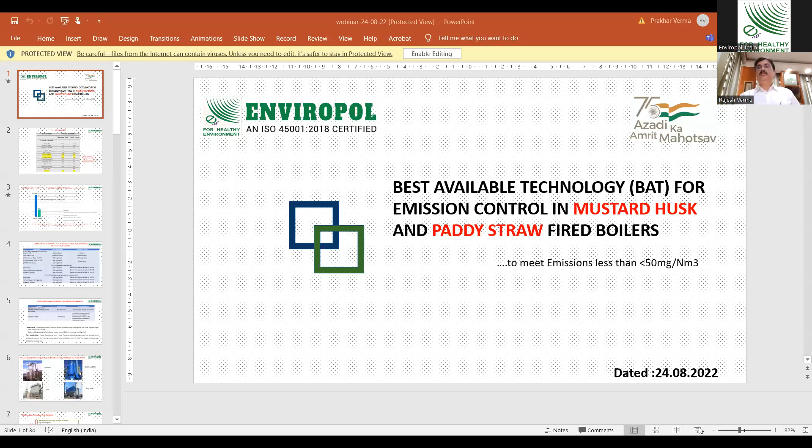Okay friends, so let us start today's learning session on best available technology, we shall be calling it BAT from now onwards, for emission control in mustard husk and paddy straw fired boilers. Today's focus is going to be to meet the new, upcoming emission norms of below 50 milligram per normal meter cube for boilers above 10 TPH.

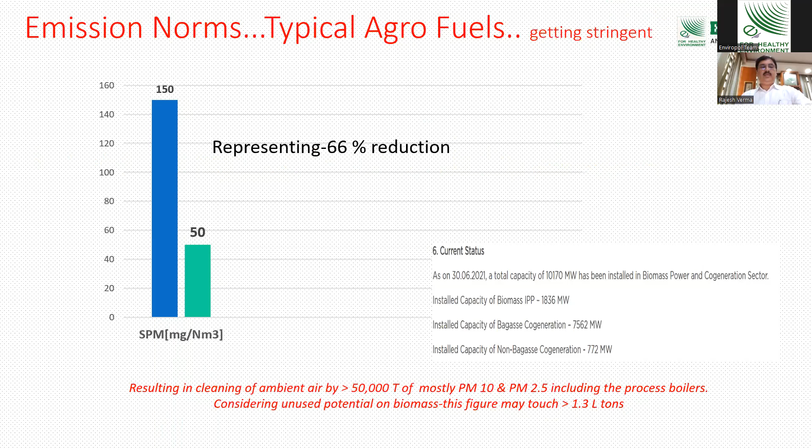So mainly potassium, sodium, chlorides and other compositions, these elements are very sticky in nature and have higher resistivity. The electrical resistivity of these fuels is higher compared to coal and other fossil fuels. The particle size, especially in mustard husk, is very fine, submicronic particle size is there.

The most critical part of the whole biomass application is the varying moisture content in the biomass. Maybe in one month you get good moisture content, but next month if the rainy season comes, suddenly the moisture increases, and that spoils the whole setup, especially on the pollution control side when you have a bag filter. So these are basically the nature and characteristics of the fuel, the morphology, which creates problems in the APC devices or existing technologies.

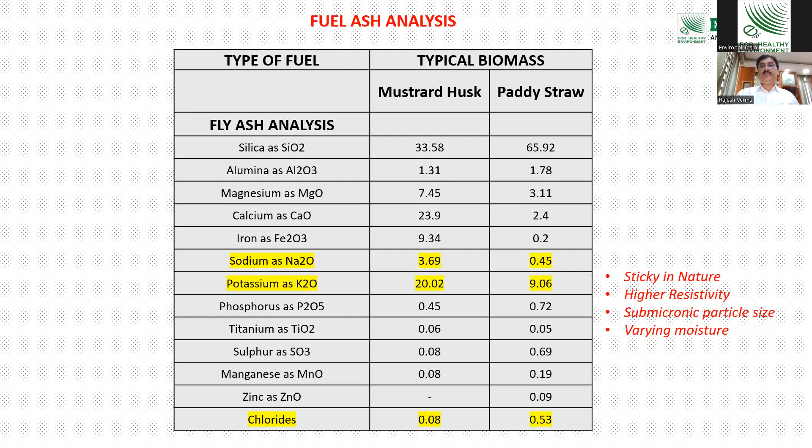On the other hand, the emission norms are getting more and more stringent. If you look at the overall picture on biomass generated power, by reducing from 150 milligram to 50 milligram per normal meter cube, we are going to clean our environment by more than 50,000 tons of fly ash. This is considering that as on date we are producing approximately 10,000 megawatt of power from biomass.

Either from the cogeneration sector or independent biomass-based power plants. Considering this, and considering PM10 and PM2.5, we are going to clean the environment by more than 1.3 lakh tons of fly ash, taking into account that the biomass potential which exists in India can be consumed in the next couple of years, and thermal power plants also start using biomass. As on date it is about 50,000 tons, but in successive years, as the biomass proportion increases in all thermal power plants, this figure may touch about 1.3 lakh tons of fly ash, which is quite a big amount as far as environmental pollution is concerned.

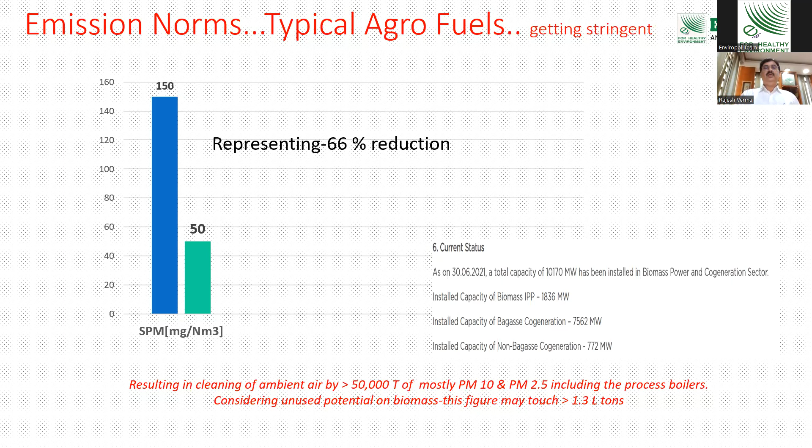Comparing the existing norms and proposed norms: all boilers above 10 TPH now have a limit of 50 milligram per nm cube, as against the earlier norm of 600 milligram. Especially in the NCR region, people are trying to get more stringent, below 30 milligram, and most plants are aspiring to get there. Below 10 tons, the emission norms are still 150 - earlier it was 800. And less than 2 tons, it is 500 milligram.

So our focus today is going to be on below 50 milligram for all those boilers, because this particular sector we are addressing today mostly has boilers of 10 ton, 15 ton, 20 ton, or maximum 60 tons.

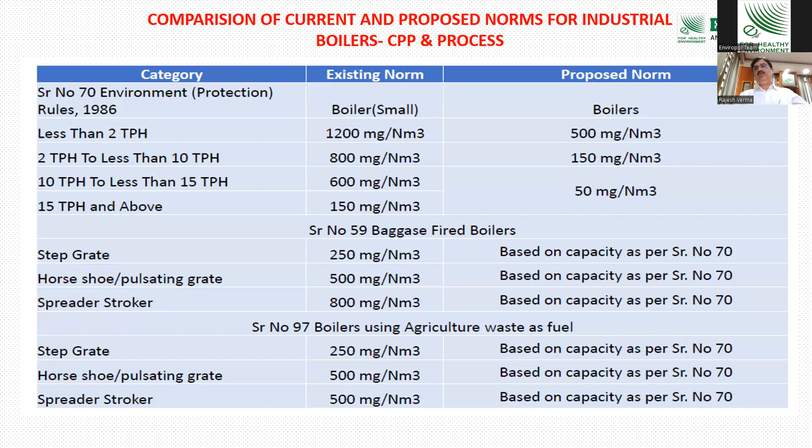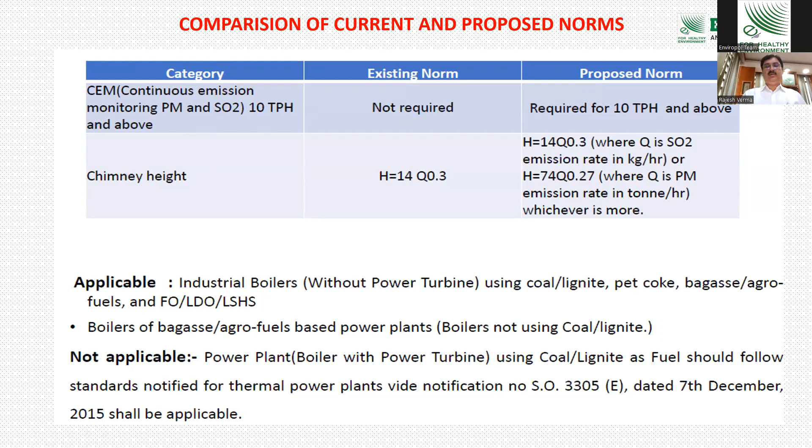Other norms, especially regarding the continuous emission monitoring system, CEM - all boilers above 10 tons would require CEM to be installed on the chimney as per the new proposed norms. So this covers the norm side, the mandatory emission norms.

Now let us review the prevailing technologies which are mostly available in this sector as on date, and the concerns the customers or operators are facing.

Majority of the plants in this category are still using cyclonic separators. The earlier norms were 500, and cyclones were able to meet that in most cases, barring a few where they were not designed properly. Otherwise, cyclones are capable of meeting below 500 milligram. So majority of the sector has cyclones as on date.

Some people have upgraded in the past to ESP, some to bag filters, and some have added a scrubber. Wherever the cyclonic separators were not working and people were targeting below 150, especially in boilers above 10 tons, they have gone for either wet scrubber, bag filter, or ESP, in addition to the cyclone.

Now let us see, given these four technologies are present, what is their condition, what are the concerns on each category, and why do we need something beyond this? When we want to achieve below 50 milligram, why do we need to upgrade the technology? Why can't we make changes to achieve below 50 milligram?

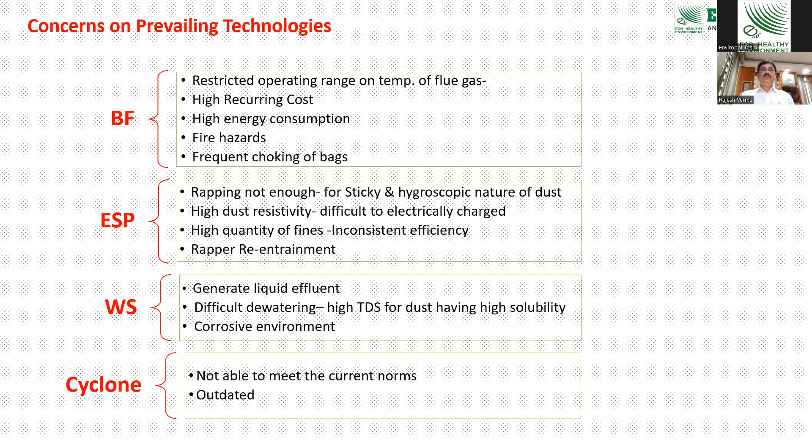So, to summarize everything, the limitations on the existing systems are basically because of these parameters. The fine particles, the ultra fine - as you have more proportion of fines, it is more difficult for the APC design, it becomes more complicated.

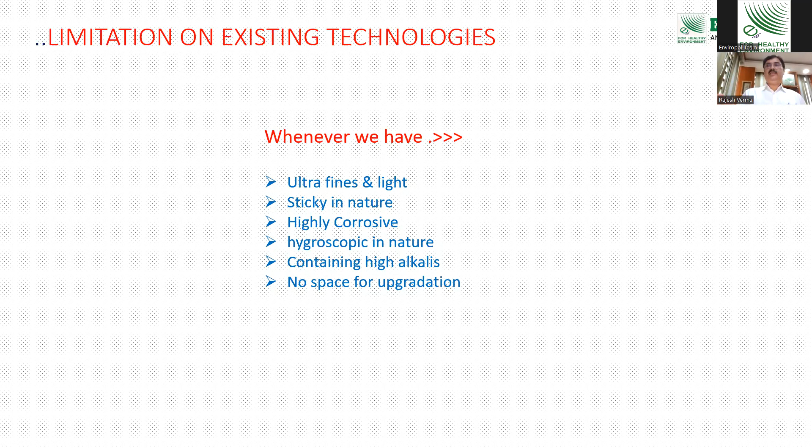High alkalis and no space for upgradation is a physical parameter which is a restraint in most plants. The space is not there for upgrading these equipments. So these are basically the limitations the industry is facing on these fuels as on date.

So if I summarize everything and put down the consolidated pain points of the industry - they are already using a difficult biomass, helping the society to reduce pollution, helping the society or the planet to reduce greenhouse gas emissions.

But their pain points are growing because of these factors. Like, in a normal mustard husk boiler, you see the input dust concentration from the boiler is in the range of 5 to 6 grams per normal meter, whereas in paddy straw, it is a high dust fuel and it exceeds beyond 15 grams per normal meter.

The current in most plants, cyclones are there, but those cyclones are not able to meet the norms. This is a pain point, definitely.

ESP and bag filters do have some limitations. This is another pain point because they do not know which way to go. If they use ESP, they have some concerns. If they use bag filter, they still have some concerns. So what to do? Wet scrubbers, if they use, still they have some concerns on dewatering and all.

So the technology limitations are there. This is another pain point which the industry is suffering with. High recurring cost - in a couple of technologies people have gone with, they are having a high recurring cost of replacement of bags or replacement of electrodes every 3 years.

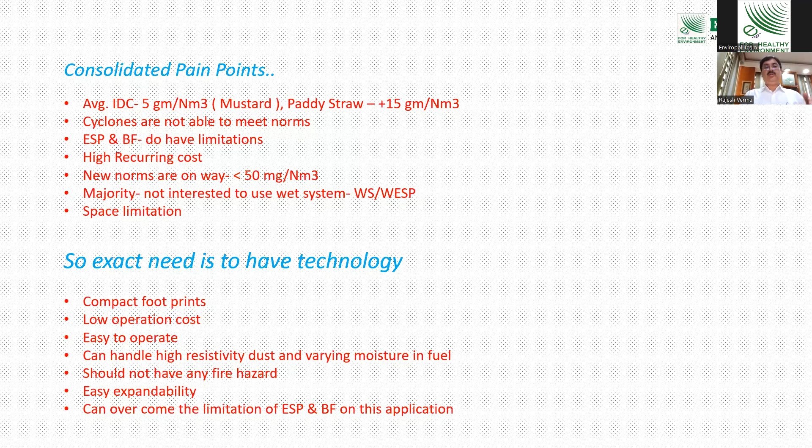And the technology should be able to overcome all the limitations of ESP and bag filter. Either it should replace or it should complement them, either way is possible. If it can complement the limitations, that's a good combination. Or if it can remove those limitations completely, that's another solution. So we will be discussing the new technology based on these parameters we have listed, to see how the new technology qualifies on all these parameters. So what is the solution?

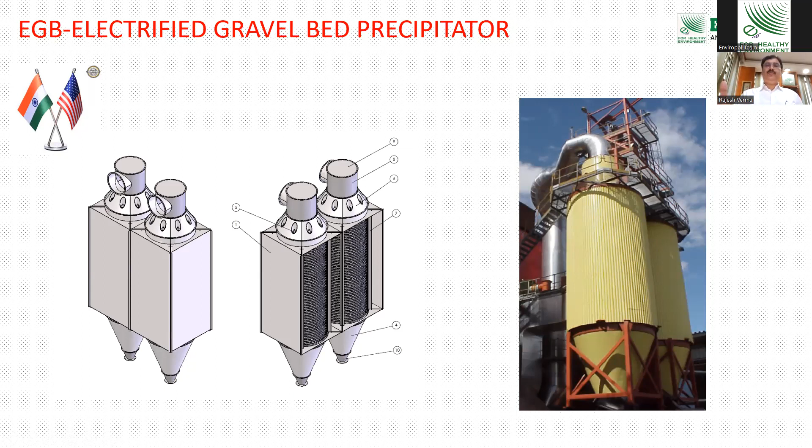So we shall be discussing what EGB is, because many of you may not be knowing about it. Let me explain the system configuration of EGB, how it looks, and what accessories are attached to it. This EGB is basically a cylindrical vessel. It can have one vessel or two vessels, depending on the sizing or the volumetric flow rate of the gas and the dust quantity.

Within this vessel, there are gravels. When I say gravels, these are stones, pea gravels, normal gravels which you get from the river. This complete section is filled with gravels, and the thickness of the gravel bed may vary based on various design input parameters and desired output parameters. So what we do is ionize the gas particles to a negative charge, and then the gas passes through this gravel bed. It could be top to bottom, or bottom entry to bottom outlet, or reversed. It can be designed both ways.

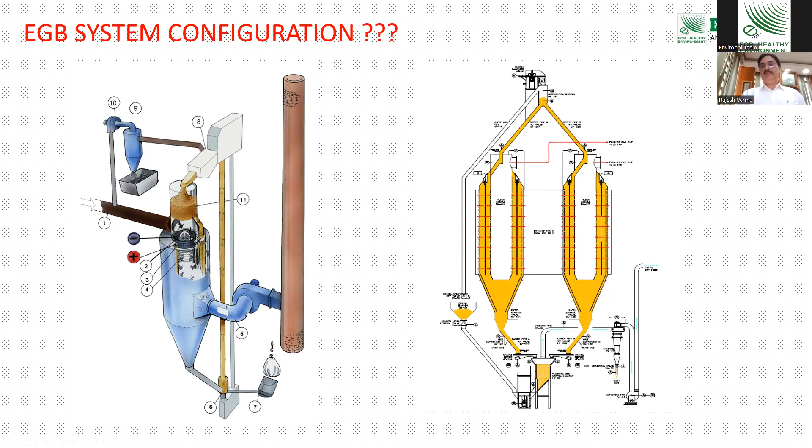Now let us see the principle of its operation, how it works.

As I mentioned, that exhaust gas first passes through an ionizer, which is a pre-charger basically, which charges the particle. This has got a TR set and an ionizer, where the particles present in the dust, in the flue gas, get negatively charged.

And when the negatively charged particles pass through this gravel bed, which is electrified giving a voltage of 20 to 30 kV, these are the discharge electrodes embedded into the gravel bed. When the electrodes are given a voltage of 20 to 30 kV, the whole gravel bed gets polarized and gets a balanced charge.

Half of the gravel gets a negative charge and the other half gets a positive charge. Because gravel is a non-conductor of electricity, it receives the voltage and then gets statically charged from all sides. So when the negatively charged particles pass through this gravel bed, which is already electrified, the positive side of the gravels captures the negatively charged particles.

This gravel bed is continuously moving from top to bottom because of the gravel feeder at the bottom. The RPM of that can be controlled, and accordingly the speed of evacuation can be controlled, and efficiency and pressure drop can also be controlled by doing this.

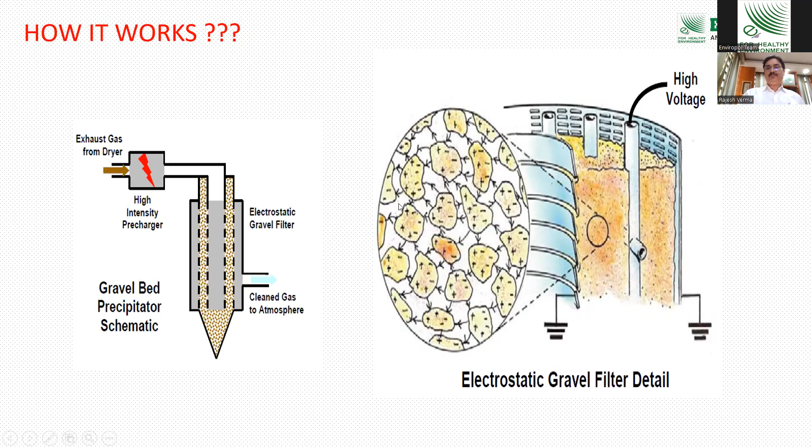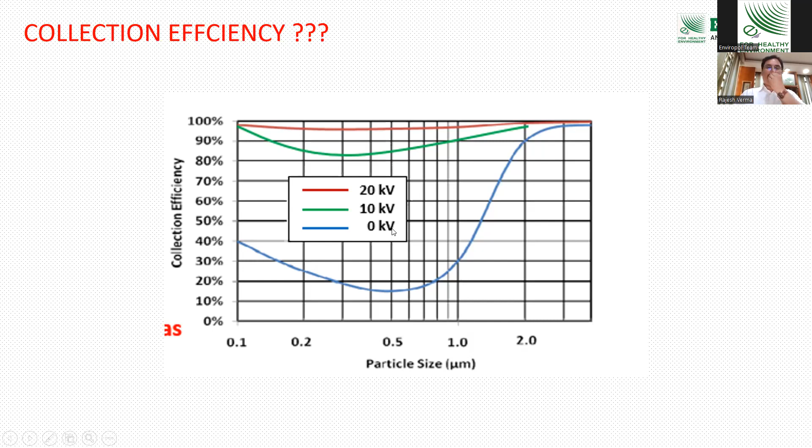I'll now show you some videos. Please see these videos carefully.

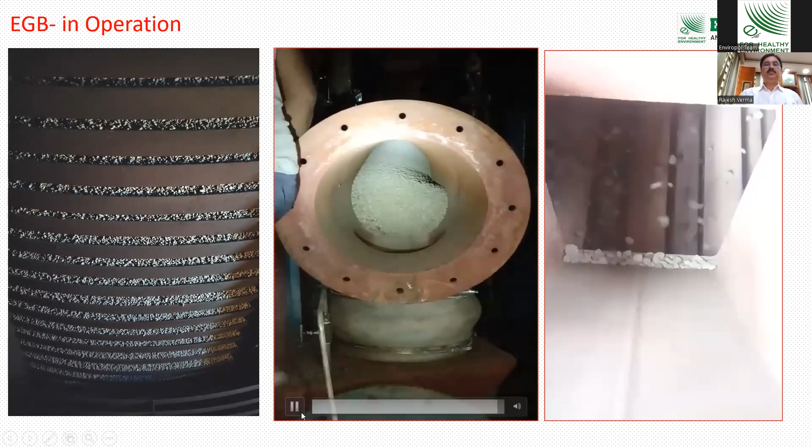So you can see some loose ash on the gravel when it is moving. It is because the electrostatic field is over. When it comes out from the electrostatic field, out of the EGB vessels, the ash particles which were deposited on this get loosened up and then get separated easily by pneumatic pressure.

And after cleaning, in the gravel cleaner, you see how the gravels get cleaned. This is the operation of the gravel cleaner, where mechanical and pneumatic pressures are both used to clean these gravels and take the ash to the cyclone through a dedusting fan.

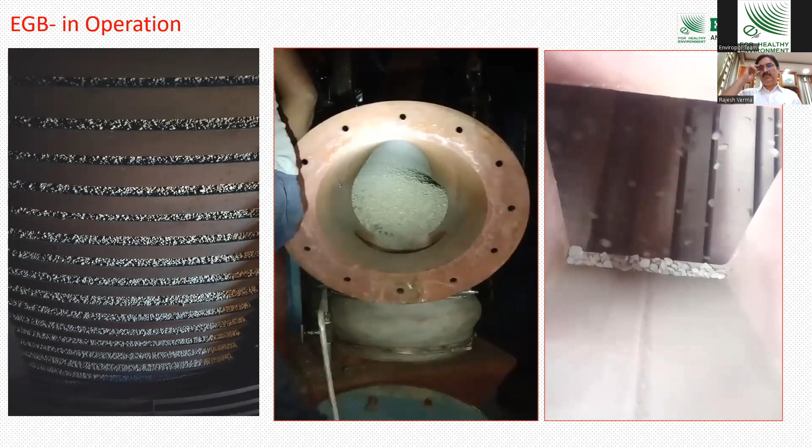So I hope these videos can give you a lot of insight. And you see the clean gravel - this is the clean gravel, and this is the ash deposited gravel.

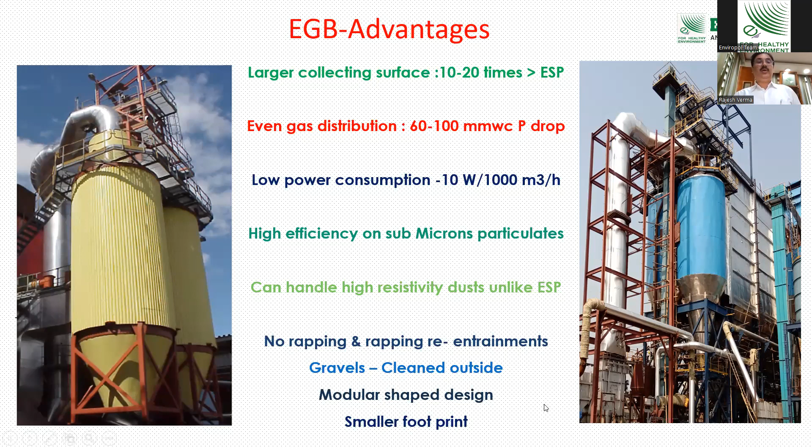So I hope you are enjoying this session so far. I'll now like to show you a couple of references worldwide on this technology.

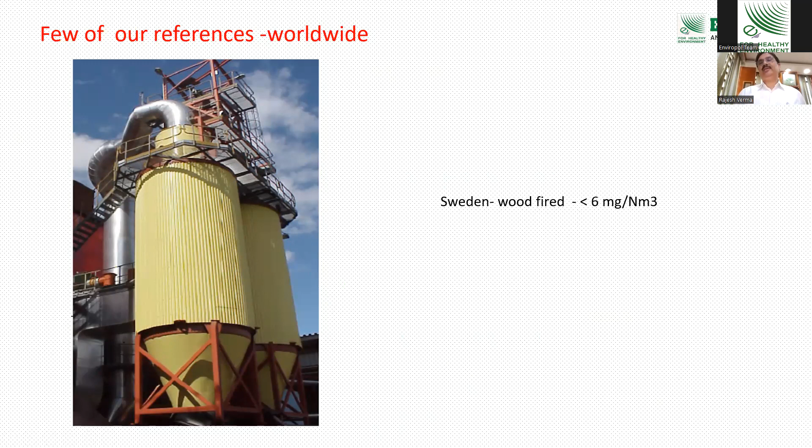This is the installation in Sweden, which I have seen personally running on a wood-fired, rubber wood-fired boiler, consistently for the last 15 years. And the emissions, which I have seen from my eyes, are below 6 milligrams. Their record also says it was designed for 10 milligrams, but consistently they are getting below 5 to 6 milligrams emissions from this boiler.

This is the installation recently done on a spent wash fired boiler in India, attached with a 2-field ESP, because in a spent wash the input dust concentration is very, very high. So we used ESP as a pre-dust collector for the coarser particles, and the fine particles are captured in the vessel, or the EGB. This has been demonstrated at 50 milligrams per normal meter cube.

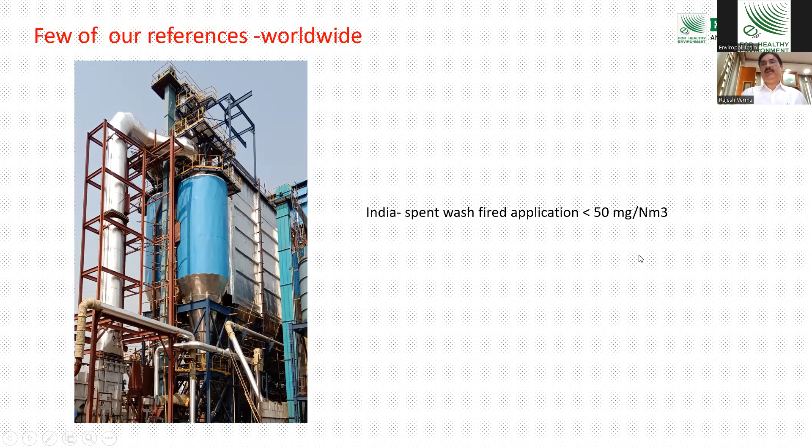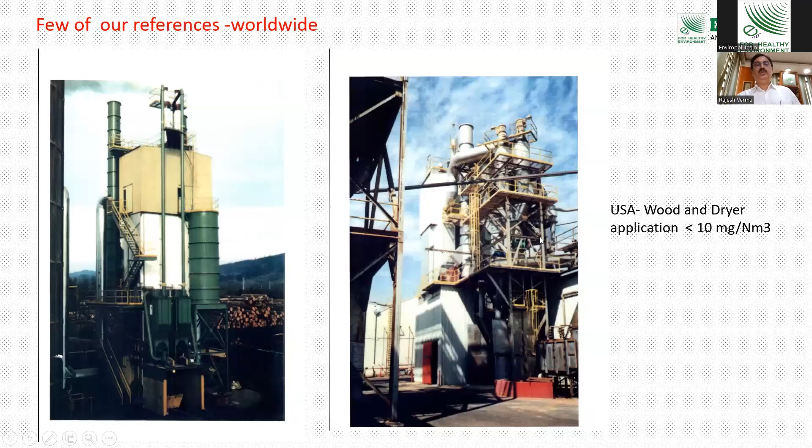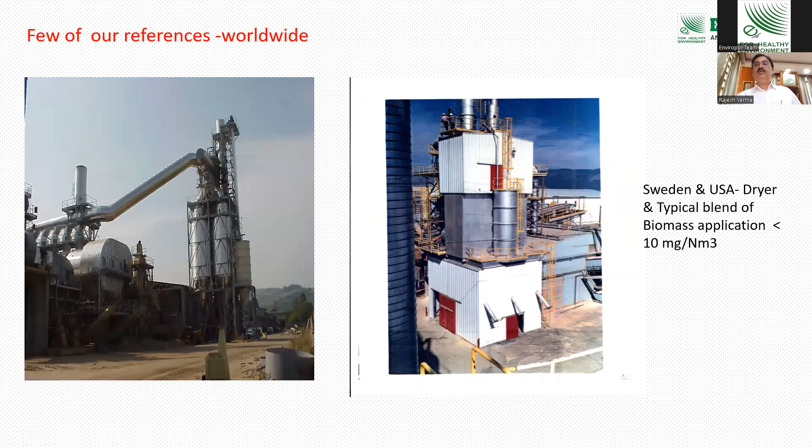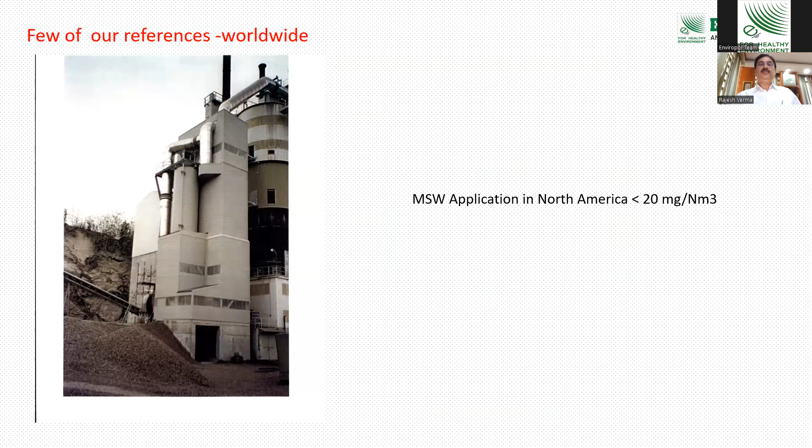Other installations in the world, on the left-hand side and on the right, are on wood and wood-based dryer applications, less than 10 milligrams. Then on typical biomass applications in Sweden, and again in USA, below 10 milligrams. MSW application, municipal solid waste, in North America, less than 20 milligrams. And there are a few more, in India, because this technology came only 3-4 years back.

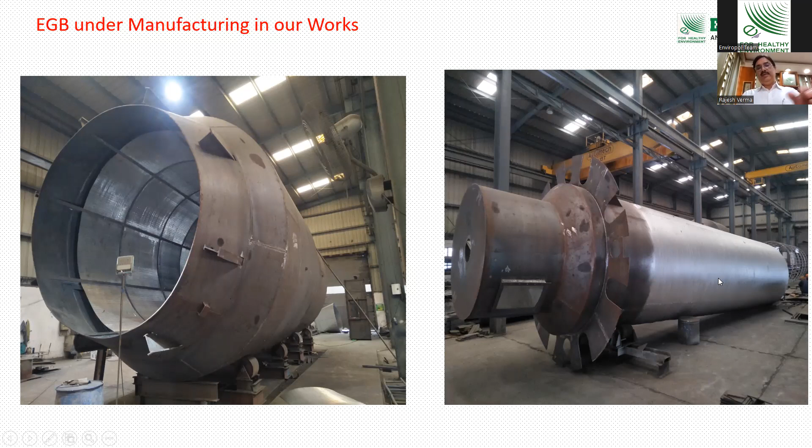This is the EGB vessel, then you have louvers, and then you have the inside capsule, and within this capsule and vessel the gravels are filled. This is the discharge electrode cage which is embedded into the gravel bed. These are insulator housings.

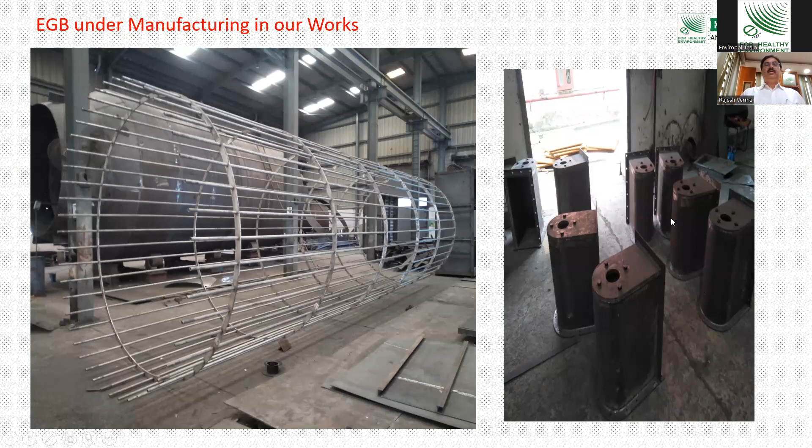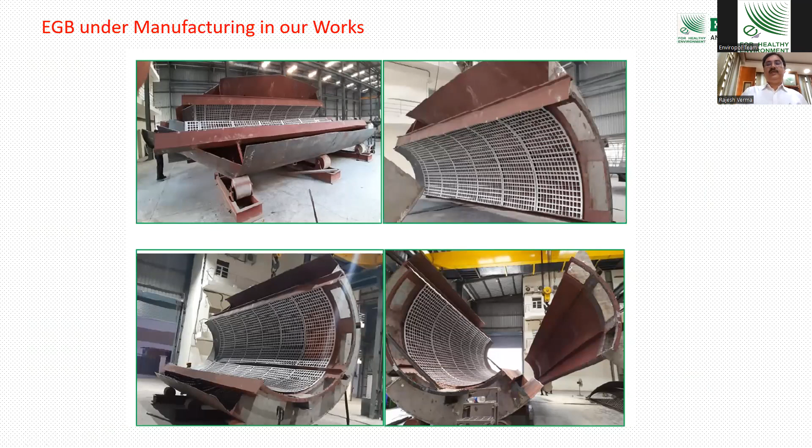This is another EGB which has been made in knockdown condition because of the size. These are a couple of EGBs under dispatch to various industries.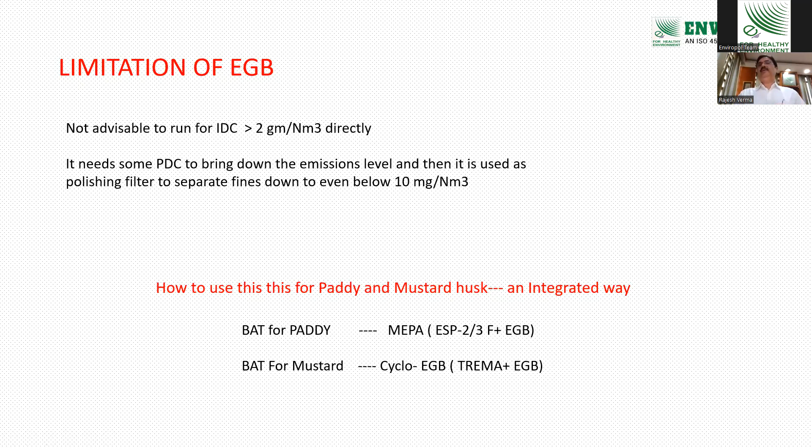As I told you, MEPA for paddy straw is a combination of ESP and EGB. So whatever limitations exist on EGB, and whatever limitations exist on ESP, the EGB can complement and be used as an advantage to give you consistent emissions of below 50 milligrams or 30 milligrams, as the case may be.

So this combination, we call it an integrated model, or the hybrid model. And the trade name, which is already patented, is MEPA, Maximum Efficiency Particulate Abatement System. This is the most advanced technology as of date in the world, under the category of dry separation technology.

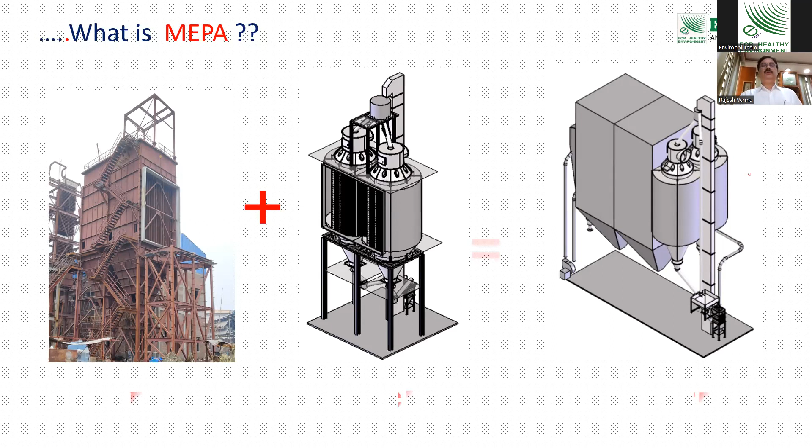The existing ESPs in these plants can also be upgraded by just adding fields. The conventional way of upgradation is to keep adding the number of fields in the ESP. But in most cases, on such fuel, that doesn't help beyond a certain extent. It helps bring emissions down to 100, but bringing it below 100 or below 50 becomes a challenging task on such fuel, which has a varying nature in terms of moisture and is very sticky.

The other way to upgrade your ESP is to add an EGB at the outlet funnel. So without adding much footprint, if your outlet funnel is about 3 or 4 meters, you don't need any extra space to upgrade your existing ESP. If there is no space, the EGB can also be planned on the side of the ESP by just rotating the ducting to that side. So these are the upgrades available for ESP.

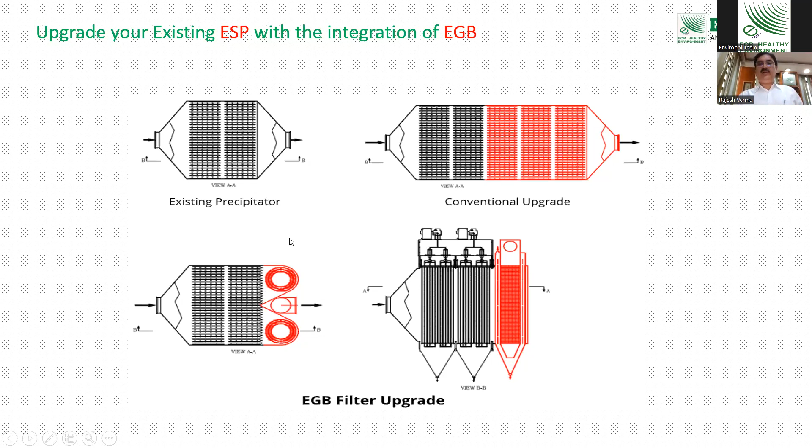Then we come to mustard husk fired applications, where after a lot of discussions with various stakeholders on this particular fuel, we have come out with a solution which is very simple, low maintenance, or I would say least maintenance - a combination of a cyclone, a good cyclonic separator, attached with an EGB. So this is the model.

We can have a TREMA cyclone depending on the volume of flue gases, or we can have a twin cyclone as well.

The advantages are two-stage separation - you have a cyclone as well as EGB. So if something goes wrong with one, the other can take care of it to a great extent. Primary separation by the cyclonic separator, secondary separation by the EGB, modular design and a very compact footprint. For a 15-ton boiler, this whole system can be finished in 6 to 7 meters.

Least recurring cost, because there is nothing here which gives you a recurring cost except the gravel replenishment, which is not more than 20,000 to 30,000 rupees per year. Only 10 to 20% of gravel is replenished, because during the travel of gravels, some gravels get reduced in size due to frictional losses, and there is a grit separator system attached which keeps separating the very fine gravel to remove from the system. So it keeps maintaining the level - consumption is not more than 10 to 20%, and the cost is not more than 20 to 30,000 rupees. So recurring cost is almost nil or negligible.

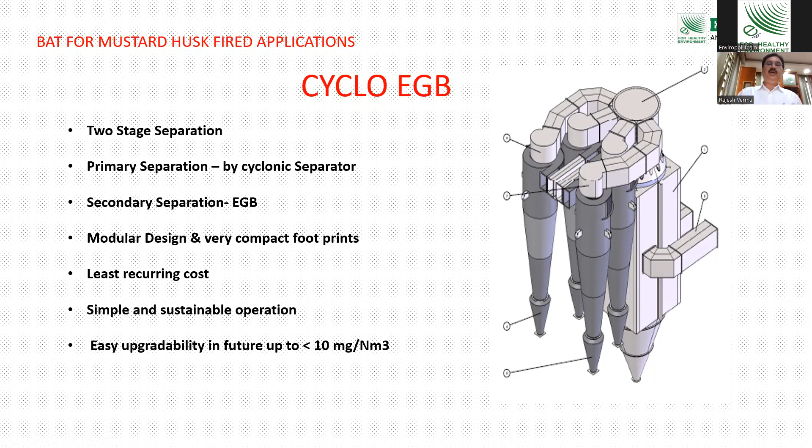This is the overall PFD, process flow diagram, with the cyclone, then the EGB, and then you have the gravel cleaner, feeder, and gravel, this bucket elevator, and then fan, and then chimney. And this is a gravel hopper. Number 10 is your fan.

So you can use either a bag filter here, a small bag filter, or a cyclone, depending on the type of dust for dedusting. For mustard husk and paddy straw, we can have a small cyclone designed for dedusting that small quantity of air. The cyclone diameter would be around 300 to 400 mm, that's all.

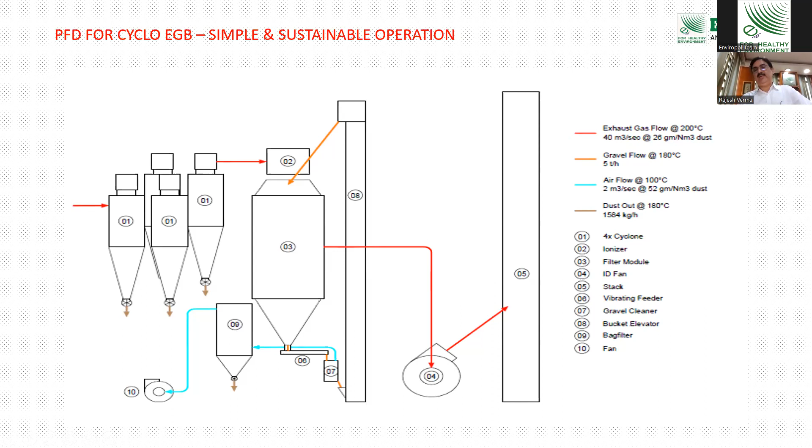So we are approaching the end of this session with a conclusion. The best available technology for paddy straw is MEPA, an integrated solution of ESP and EGB. Whereas the best available technology for mustard husk is a cyclo EGB, which can give you below 50 milligram very easily, and is upgradable to even below 20 or 10 milligram in future.

So friends, I would like to appeal to everyone working in these fields to have a serious review of their existing technologies, the problems they are facing, and map it with these two new technologies, and then call for action. Everybody is listening and thinking that this is a new technology in India, so why should I go first? Let others install it first.

So I would like to clarify that this is not a new technology. This has been innovated in the 1980s in the USA. There are more than 100 installations worldwide with typical characteristics of fuel. The purpose of this innovation was only to address high resistivity dust and sticky dust.